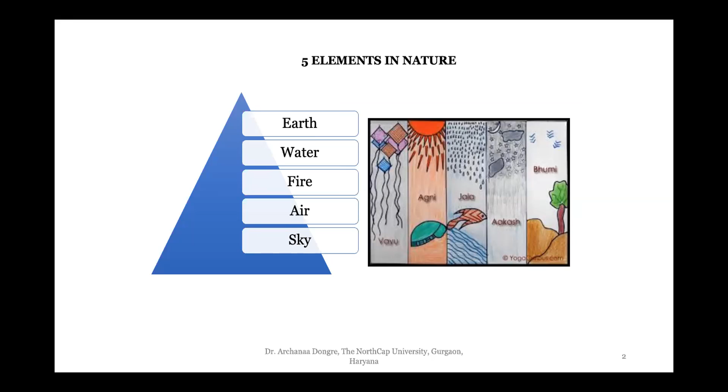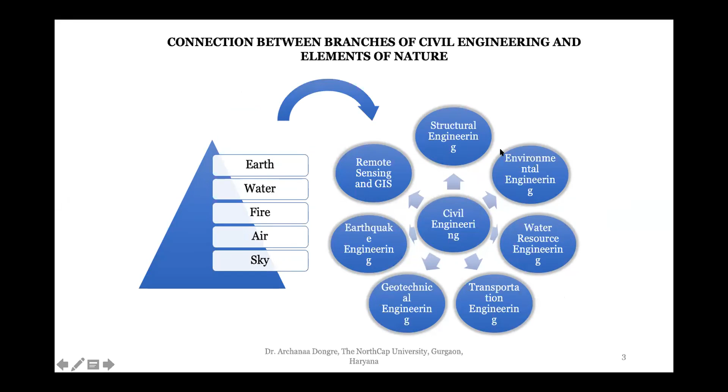Being civil engineers, most of you are faculty, so you know this wonderful thing - we take all these elements, and there are so many branches in civil engineering, and you must be expert in one or more of these branches. So nature and human beings, there has to be coexistence, and harmonious existence for us to sustain. The word sustainable, we are using more and more, because everyone is working towards sustainable development now.

In civil engineering, we always talk about it, that equation of equilibrium should be satisfied - we've heard it a thousand times maybe. And that is the most important thing, how do we get that equilibrium. So equilibrium in nature, and even while studying civil engineering, that equilibrium we have to see.

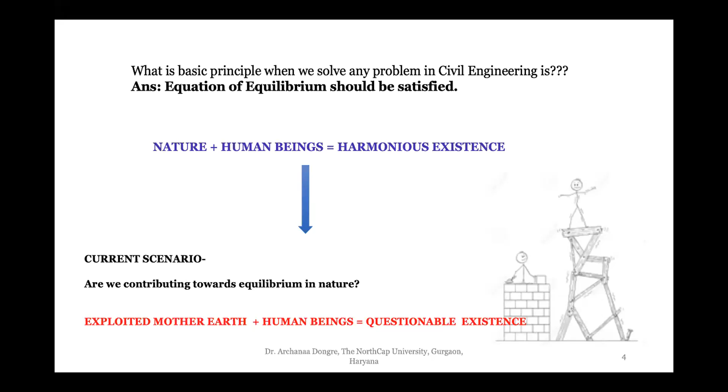But the current scenario is exploited Mother Earth, and human beings are the reason for that, and our existence itself is questionable, and we are currently experiencing that.

Now, when we see our past, we are really blessed with a great civilization. If you see these examples of Nalanda University, the ancient temples, and Mohenjo-daro - how beautiful our civilization and our history was. We witnessed the best, I think, of history.

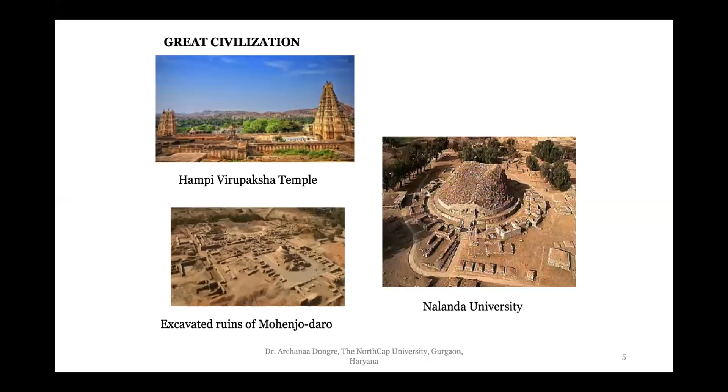But yes, there are some challenges. What were the challenges, I'll show you in the coming slides.

So this is an example of a concrete jungle - you will find so many photos on Google. When we see it, we really feel, my God, what's happening literally? Where is the tree, if you see in these pictures? That's the total failure in maintaining this equilibrium in nature.

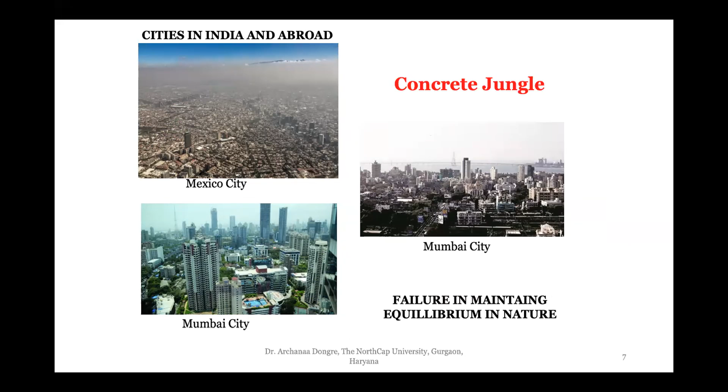And why am I showing this picture? Because we are civil engineers, right? We are the leaders, we are the builders of this. So I wanted to show where we are heading. Similar examples of Delhi, Bangalore, Ahmedabad, and the industries and air pollution happening. Currently I'm sitting in Gurgaon, and this pollution is at its highest rate especially in Delhi.

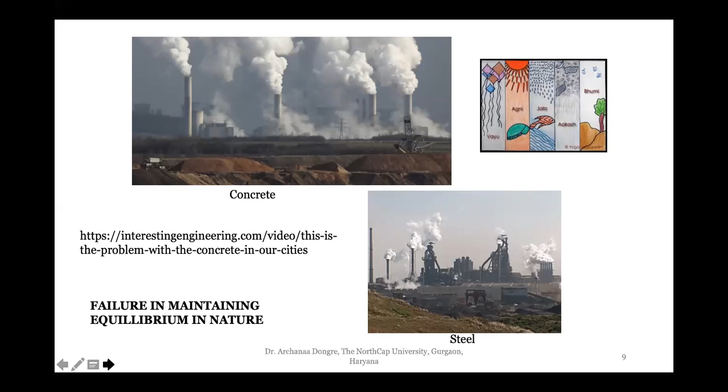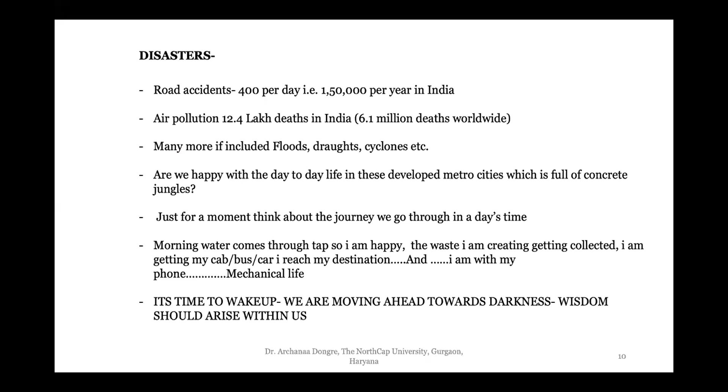Apart from that, this slide is showing us other disasters, right? Road accidents - 400 per day. That is, I think, maybe a small number, and maybe reduced during the lockdown period. 150,000 people die in India because of road accidents. Again, civil engineering is connected here - that's why I'm showing this. Don't think, okay, why this slide?

So this is total road accidents - again, we are responsible. Then air pollution: 12.4 lakh deaths happen in India, 6.1 million deaths worldwide. So we are again responsible here. Then if you remember the Chennai flood, drought, cyclones - there are so many examples where we are again connected.

So are we really happy with the day-to-day life in these developed metro cities, full of concrete jungles? What is happening actually is we are so used to getting everything delivered at home. I have a cab, bus, car, everything - so much comfort we are having, we're experiencing in our life.

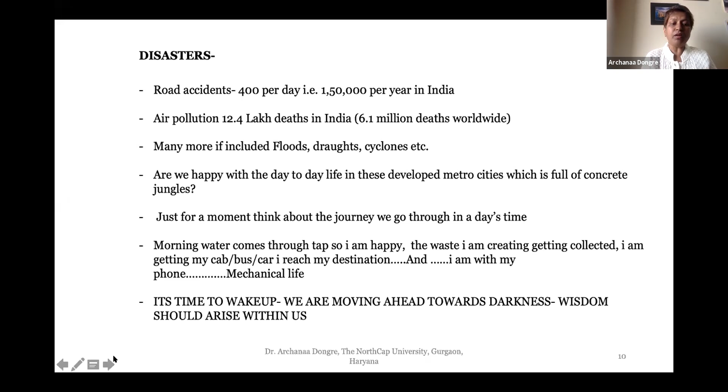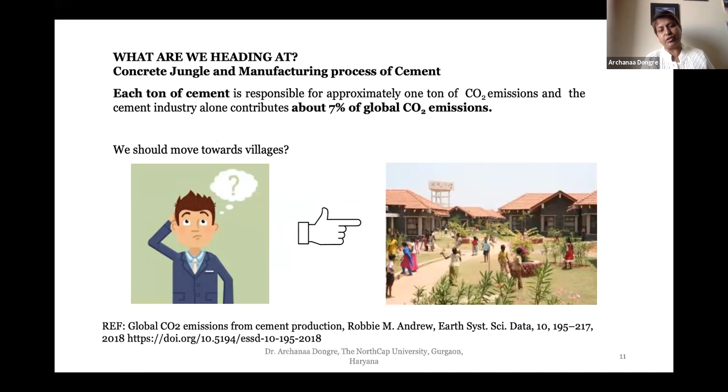Water is coming to me, everything is reaching to me, but we are contributors. Like civil engineering, at one side it is contributing, but at the same time somewhere we are responsible for the equilibrium. Each ton of cement is responsible for approximately 1 ton of CO2 emission, and the cement industry alone contributes to 7% of global CO2 emission. So this is one very big challenge in global warming.

We have to see that this shift shows the fundamental relationship between engineers and the natural world. We have to understand that man and nature are not separate entities. Engineers today must design for a planet with limited natural resources, complex problems with no clear answers, and increasing environmental concerns. So we have to think and find solutions.

This is, I think, very important. Every civil engineering student and faculty, we have to share this code of ethics for civil engineers. I share it with my students. These are drafted by ASCE. Number one, we have to hold safety paramount for civil engineers.

Then service with competence, like doctors have their oath ceremony, and they have to follow it. Similarly, civil engineers, I think we are more important than doctors, because if one structure falls, so many deaths can happen. So we are more important than them.

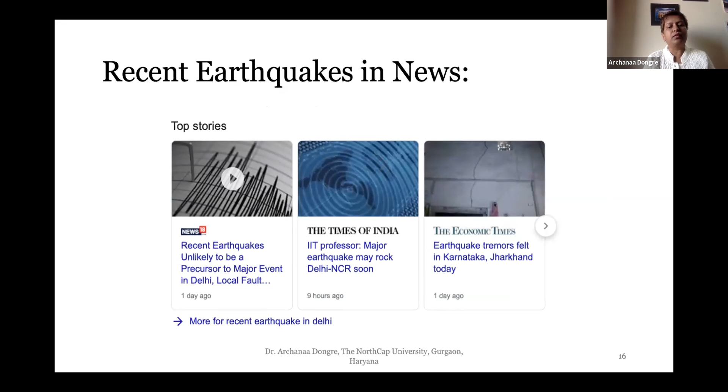These are again few examples. Now coming to earthquakes, this is also an old picture. If you just type in Google 'recent earthquakes in news,' you will see many such continuous earthquakes happening. Our earth is continuously moving. Some or other earthquakes keep on happening every time, but the magnitude is very less, so we don't realize its effect.

Earthquakes and their impact on rural structures: there are three phases. First we have to have awareness about it, about the effects of earthquakes in rural structures. We need that awareness about earthquakes, basic information on what it is, how it can cause impact on society, and then what is the cutting edge research. I think we as faculty come in this cutting edge research part.

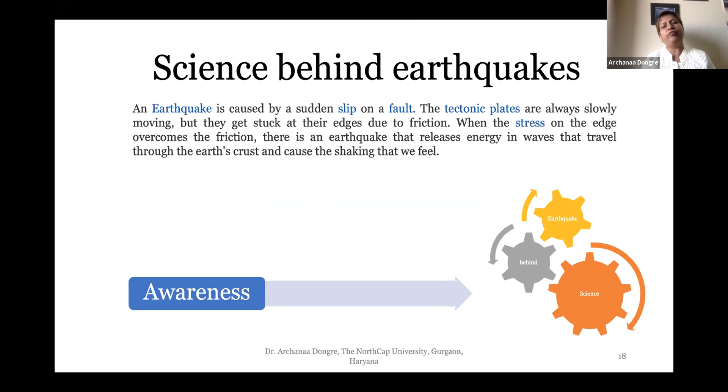Now, the science behind earthquakes, I think everyone knows, so I'll skip a few slides and go quickly. We all know earthquake is caused by sudden slip on a fault, and there is movement of tectonic plates, causing friction. When the stress on the edge overcomes that friction, energy gets released and waves form, and that is an earthquake. Classification of earthquake is based on origin, location, focal depth, epicentral distance, and magnitude. This is basic, mostly for BTech students, so I'll skip that.

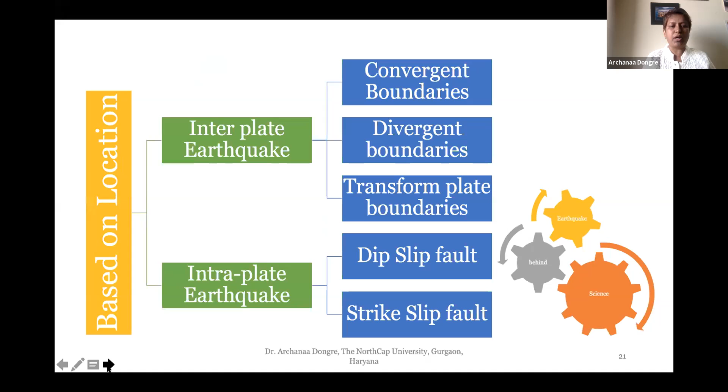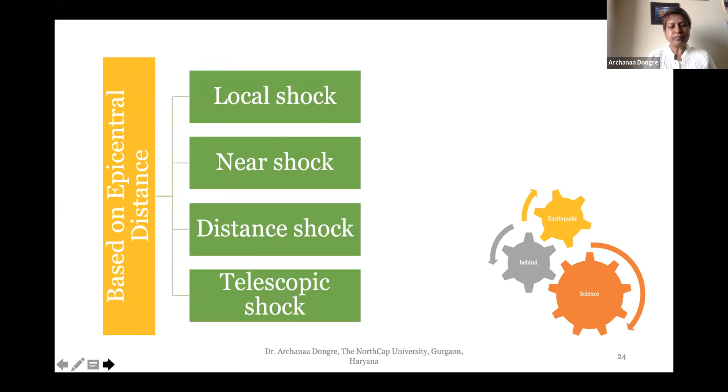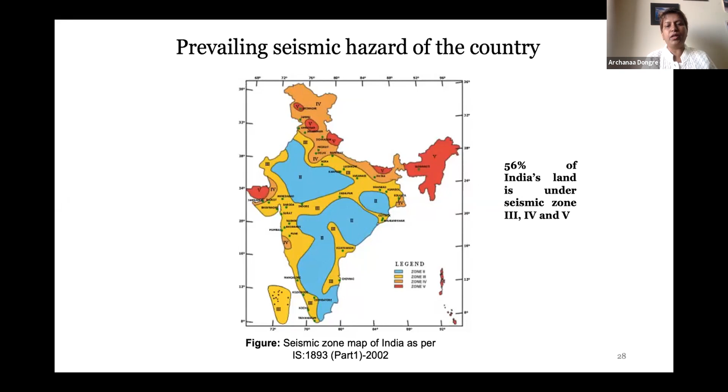Now coming to a very important picture. Maybe the first two lectures already showed you this, but this particular zonation map, the seismic zone map of India, is in IS 1893:2002, and now a revision has also come. From 2016, there are many suggestions on this map as well, so this map may also change. Here we know that we are in zones 2, 3, 4, 5, and 56 to 60% of India is under seismic zone 3, 4, 5. So this is an alarming situation.

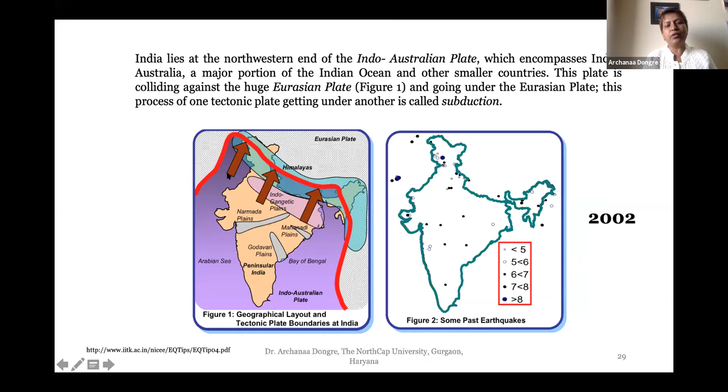So this is a picture from 2002. In 18 years, we don't know what is the current scenario over here, what is the current development. Then here is one more picture, updated for 2016, where we can see the Indo-Gangetic Plains. So this is the current update we can see.

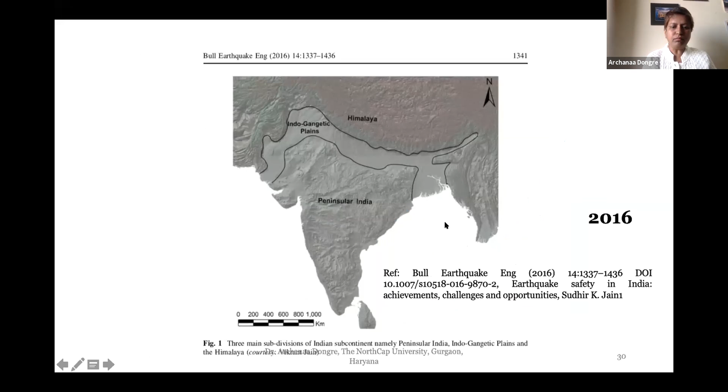So this shows the location of some significant earthquakes in the Indian subcontinent. Wherever big dots are there, that is magnitude more than 8. Smaller dots show where earthquakes came which were less than 6 magnitude. A little larger dot shows magnitude of earthquake between 6 to 7, and then 7 to 8. This is the data from 2002.

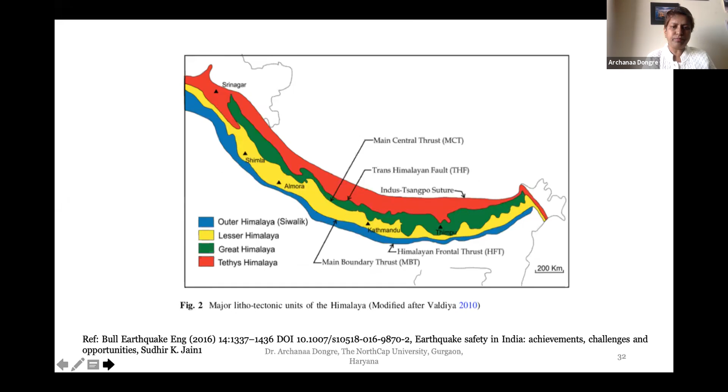Then here is a bigger picture of the major lithotectonic units of the Himalaya. From this, we can observe there has been a regular occurrence of great earthquakes in the Himalayas, and currently most of the seismic activity is located south of the main central thrust. So North India is experiencing earthquakes now and then; small shocks we keep on experiencing.

Now, peninsular India, even though far less active seismically, has also seen some very damaging earthquakes. I'll take your attention to this: Koyna earthquake 1967, Latur 1993, and Bhuj 2001. So it is clear that most parts of India are prone to earthquakes of varying magnitudes and with varying probabilities of occurrence.

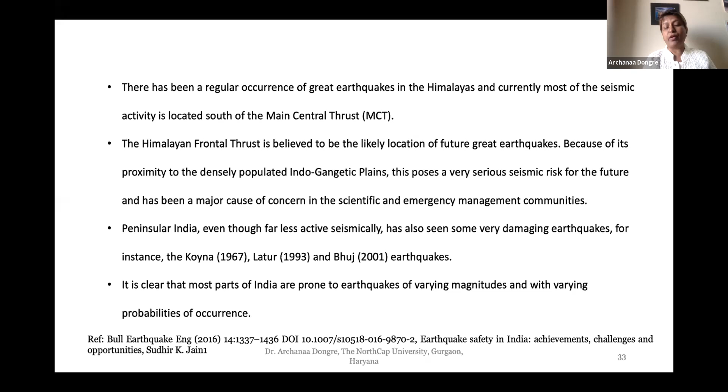Now this was part of my study: past major earthquakes that hit brick masonry construction in India. So what I did was consider 5 spots in our country - Bhuj, Gujarat, then Chamoli, then Latur, Killari, and Uttarkashi and Assam. I selected these 5 locations and studied the effect of earthquakes on brick masonry buildings. That was part of my study.

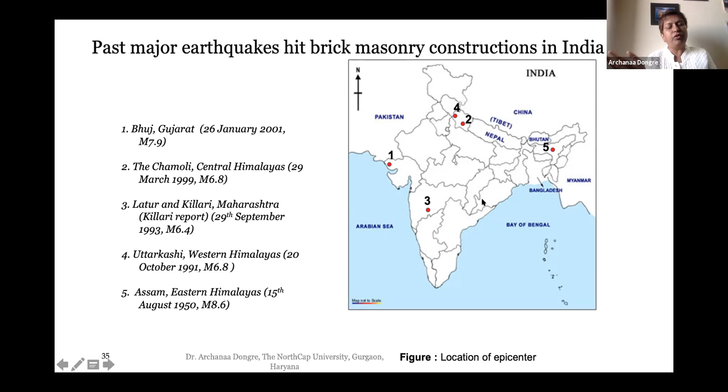We'll come to that. Before that, I have the observations of the Latur and Bhuj earthquakes - you know, the devastating earthquakes at both places.

So Latur 1993, here the magnitude was 6.2. This is the data we got from the Government of Maharashtra. Total people killed were 7,600 - 7,635 persons were killed in 52 villages. But you know, there was bad luck involved, because the time was 3:53 in the morning, so people were in deep sleep. It was a very cold night, a chilly night. Because of that, there were more deaths, even though the magnitude was only 6.2.

So there were casualties in almost all villages that experienced shaking intensity of 7 or greater. The earthquake focus was shallow, hence only a small area was affected, but with a high level of shaking - they experienced shaking up to 9 on the MSK scale. And the house typology was very vulnerable to seismic shaking; random rubble masonry was there in mud mortar.

So what happens with rubble masonry is that people keep very heavy stones on the roof, so that if big winds or some cyclone comes, the roof should hold. But during the earthquake, those big boulders on the roof only created collapse of the building, and the people could not survive. So that was a negative point of it.

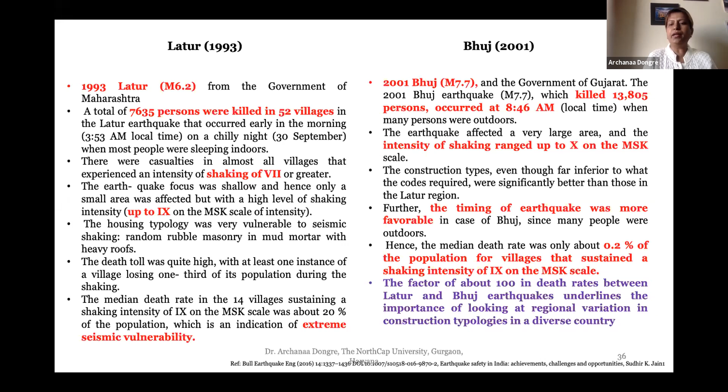There could have been more deaths than this, but the timing was a little better, so many people were saved. The earthquake affected a very large area, with intensity of shaking up to 10 on the MSK scale. Now the timing was more favorable in this case, and only 0.2% of the population of villages sustained a shaking intensity of 9 on the MSK scale. The factor of about 100 in death rate between Latur and Bhuj earthquake underlines the importance of looking at regional variation in construction typologies in a diverse country.

I want to bring your attention to the fact that India has 6 lakh to 1 million villages. I purposely took Latur and Bhuj as examples, but we have such 6 lakh to 1 million villages and around 100 smart cities. Much typical construction now happens with brick masonry houses, so we really need to work on this area.

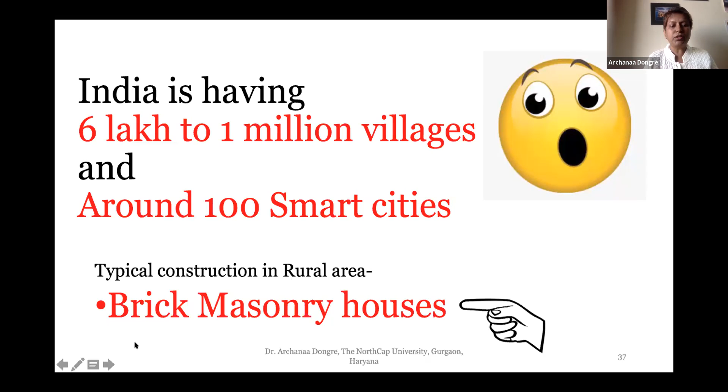There is really good work happening, but the implementation part is where ignorance still exists. Technically sound people are not there. Mostly masons are taking care of everything, and that education has not happened to them.

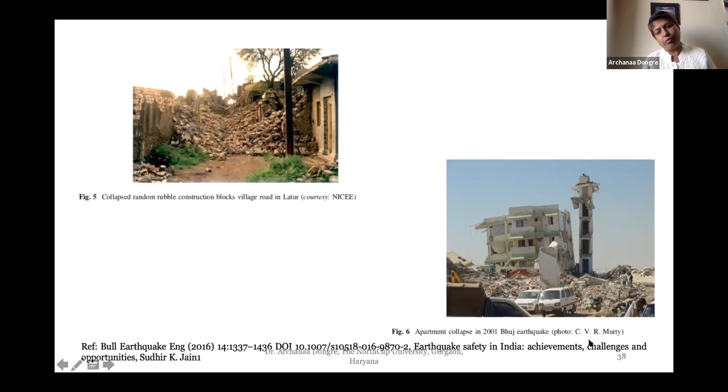So here are a few examples of collapse of random construction blocks - a village road in Latur, and on the right side, this is a 2001 Bhuj earthquake building. Professor C.V.R. Murty sir, click this.

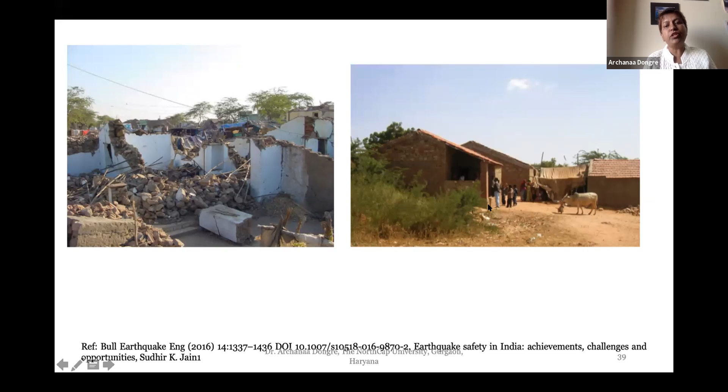This is an example of earthquakes. I got this from this document, but this is also from the Bhuj earthquake, and these are standard houses which could sustain that earthquake.

The challenges in the Bhuj earthquake of 2001 highlighted a striking disregard for structural design principles and quality of construction. This earthquake was the first instance of an earthquake causing collapse of modern multi-story buildings in India, and it triggered unprecedented awareness among professionals, academics, and the general public. So one area of major concern is the lack of a professional environment to ensure safe construction. Here the term safe construction is used in a broad sense, not just in the narrow context of seismic safety.

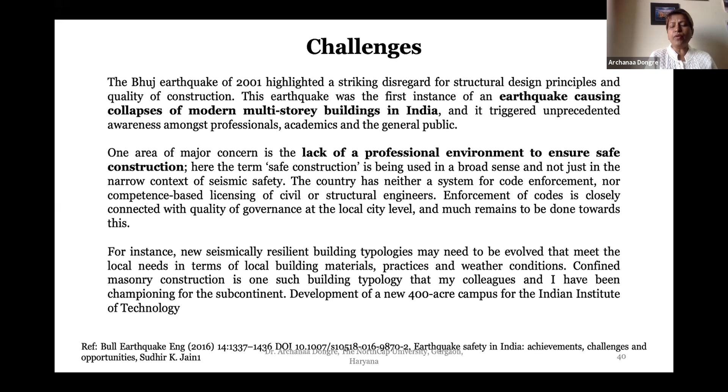We still have challenges even now. You might be aware of soft story buildings - even in cities we have that challenge. My professor, my guide, used to call them 'atom bombs.' If you have a soft story building without a shear wall, you should go check whether your building is a soft story building - meaning only openings are there, without a continuous wall or shear wall - that is a danger in case of an earthquake. Otherwise, there is no need to worry.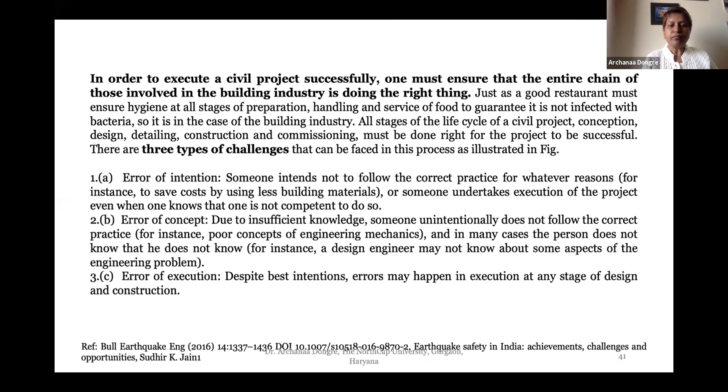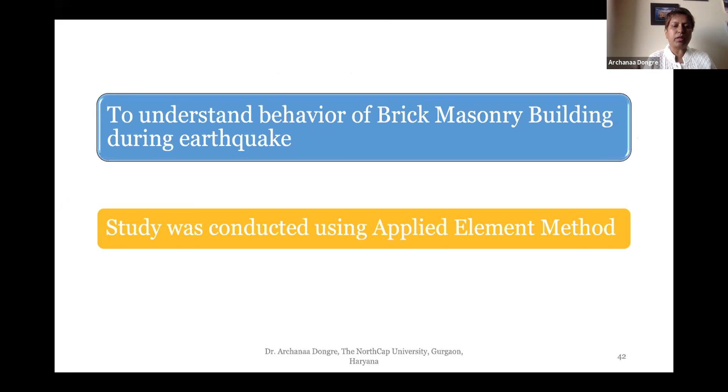Coming to my area of research, to understand the behavior of brick masonry buildings during earthquakes, I have used the applied element method. It was a Fortran program, a discrete element method program I used. I had to write the program and use material models.

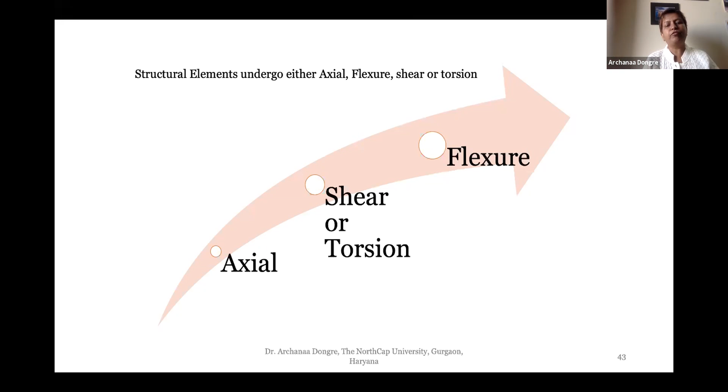Whenever we see a structural element, the basics are this: any structural member we consider experiences axial, flexure, shear, or torsion - these are the basic forces. Our life as civil engineers revolves around all this - we always think about axial, shear, and flexure as the major forces.

When I studied the performance of brick masonry buildings during past earthquakes, I observed there are 4 main types of failure for such buildings: vertical cracks at wall junctions, shear cracks, cracks due to in-plane movement, and failure due to out-of-plane movement - that is, a wall leading to total collapse.

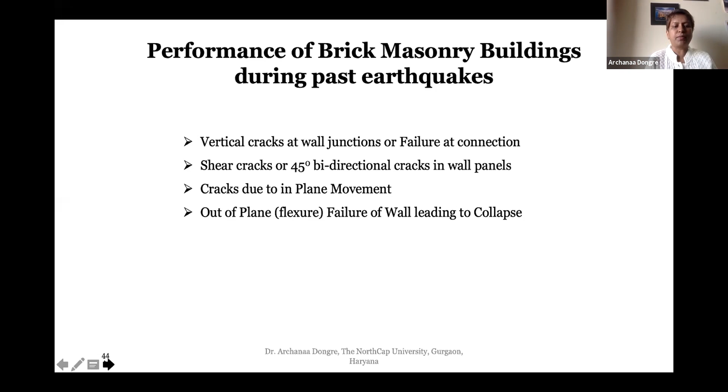This is one example of a vertical crack - this is a big wall, and here is the vertical crack at the wall junction. This is one type of failure you will see, and it is an example from the 1993 Killari earthquake.

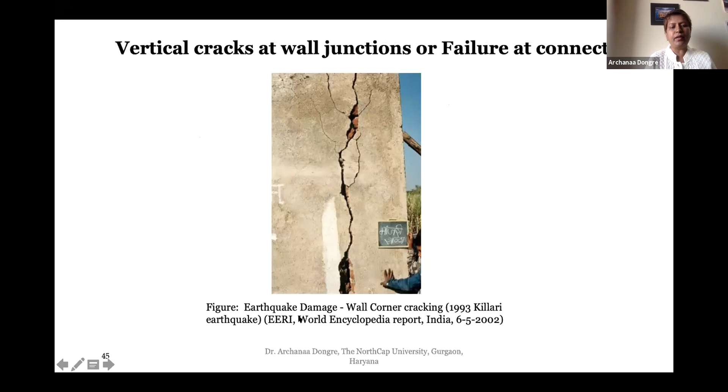This is a beautiful example of shear cracks, or 45-degree bidirectional cracks. Shear cracks are always at 45 degrees. So this is the example of shear cracks.

Here there's sliding failure of the roof and wall connection due to absence of wall reinforcement. There was no lintel provided, and due to that, this failure occurred here - you can see the shear cracks. When there is earthquake movement, you can also see vertical failure here.

Then these are the shear cracks. Crack number 1, 2 and 3 are shear cracks, and crack number 5, maybe there is some settlement of foundation. So crack number 5 occurred over here.

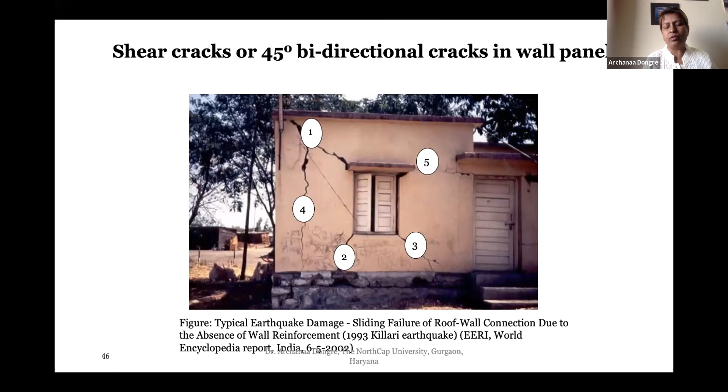So earthquake is a disaster, but it also teaches many things. We have to learn from earthquakes and work upon it so as to strengthen our building. Now this is one example, cracks due to in-plane movement of earthquake.

So here this is shear and flexural cracks along with separation of wall from roof. This is one example I have taken. You can see the connection, there is a failure here, upper failure, and even the cracks here. So this was because of in-plane movement.

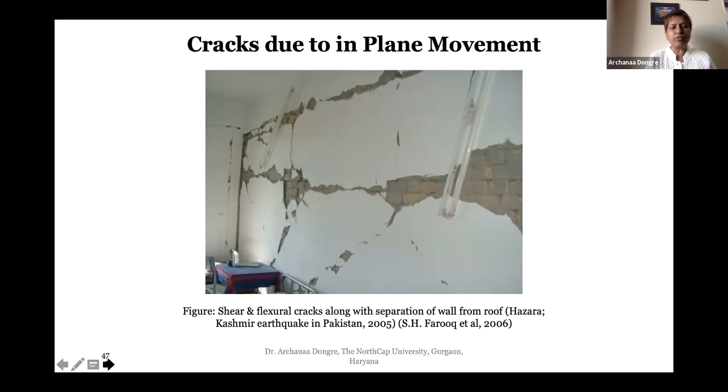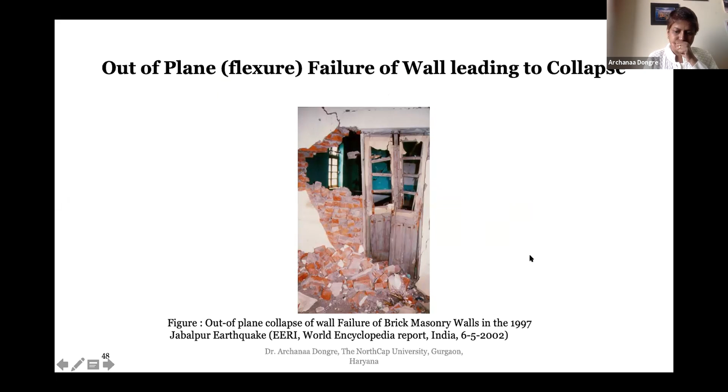Now, what is important here? So the 4 walls are there. Box section is very important.

When the 4 walls are connected properly, it creates a box section. So this box section I have tried to model in 3D, and it gives more strength and stiffness to the building, which is almost double when compared with the total stiffness of individual walls put together in 2D analysis.

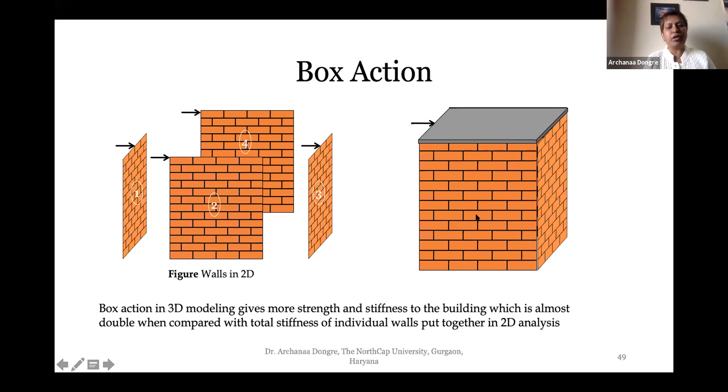So what this particular picture says, if you take an individual wall and apply load on it, versus when you take the total box, it has a very good effect. It gives more strength when it is acting as a box. So box action plays an important role in such buildings.

Now in applied element method, what do we do? First of all, why have we chosen this method? The beauty of this method is that it is capable to show failure, from the small crack, from the initiation of crack to the total collapse of the building. That's the beauty of this method.

And in this case, here we can see these are the two elements. So here, what do we consider? We divide the whole wall into small elements, and here these two elements are connected with springs.

Every two elements are connected with a spring, and this spring has a stiffness of normal and shear. You can see this spring coming in the normal direction, that is a normal spring, and this is a shear spring. So the whole element in all directions is connected with springs.

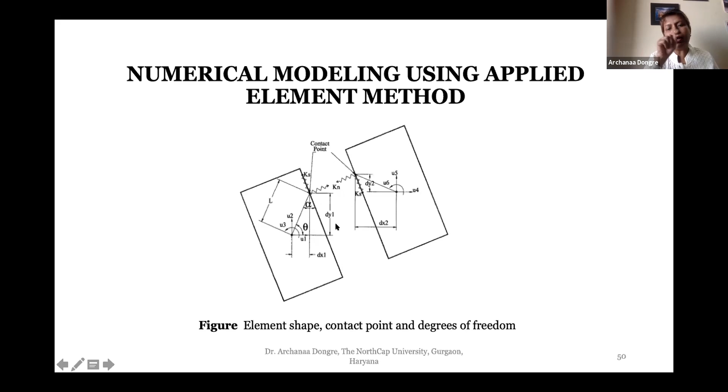That is the basic concept of applied element method. Now this is discretization of brick masonry. One brick is again divided into small parts. So this is one brick.

And the gray portion you see, that is the mortar bond. Wherever mortar is there, those springs will take the mortar property, and wherever brick is there, it will take the brick property. So here we call the brick a unit spring and the mortar a joint spring.

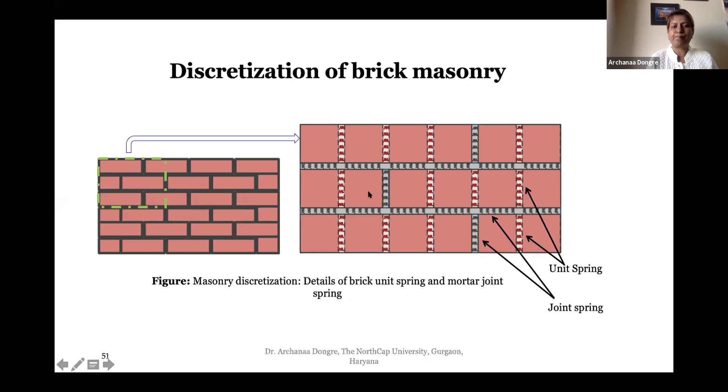Now these are the equations I have used for stiffness of spring in normal direction and shear direction. And this is the brick model, showing how the brick will fail. And this is total failure. F1, F2, F3 shows the failure plane.

How the... I'm sorry, but I'm getting disturbed. Some voice is coming.

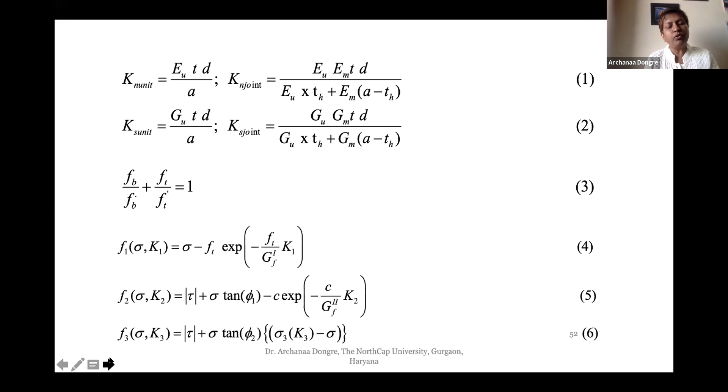Then F1, F2, F3, these are the failure planes. We have to model, write all this in the program, and then run it, and we'll see the failure patterns. So this is the model I have used.

For brick masonry, there is a cohesion degradation, bond degradation. There is a bond between brick and mortar, so how the bond will degrade when earthquake load is coming. Then how is the failure criteria for joint spring, and then hardening and softening for a joint spring.

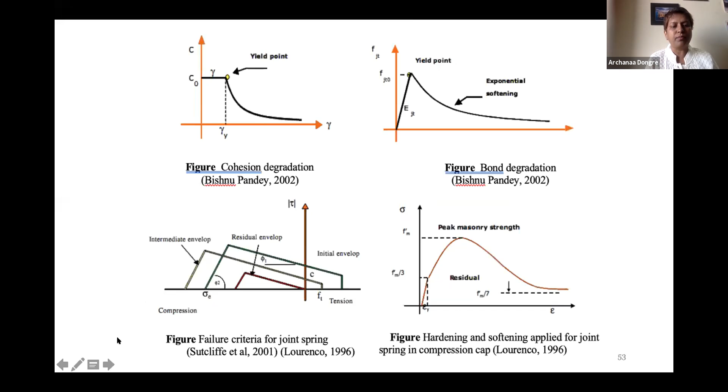So this is the modeling I have used, and these are the equations related to these diagrams. Then there is also concrete in tension and compression, how concrete will behave, how it will fail. Then concrete in shear, how concrete will fail in shear. So these are the models I have used for failure of concrete, and also this is the model for steel.

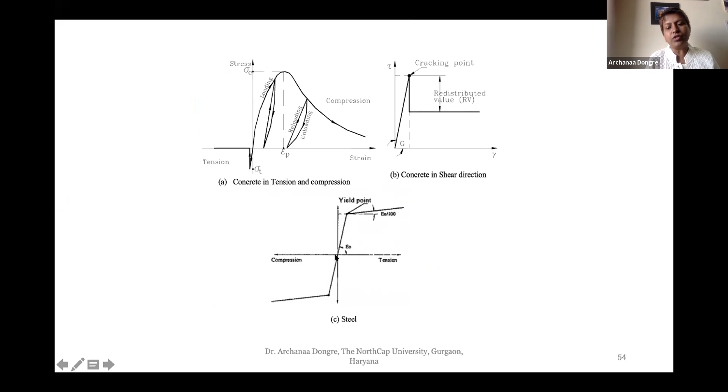So all the material we model, we have to write a program about it, and that program should run. In this study, I have considered aspect ratio, meaning how walls of different sizes behave when some load is acting.

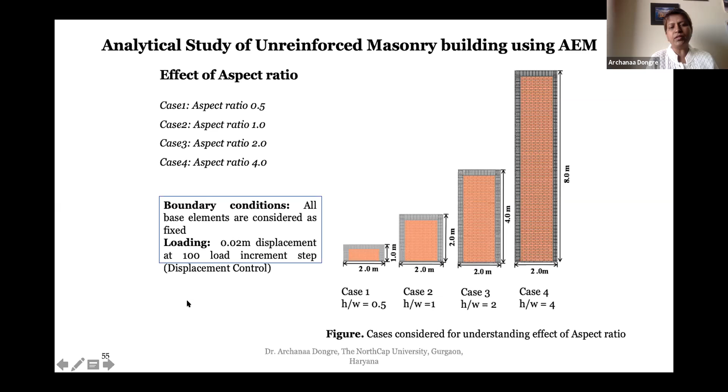My observation is that when the aspect ratio is very small, it has very high stiffness and very good strength. This is the diagram of base shear versus drift ratio, and a low aspect ratio shows very good strength compared to when you take the aspect ratio as 4. So as aspect ratio increases, the strength of the wall decreases.

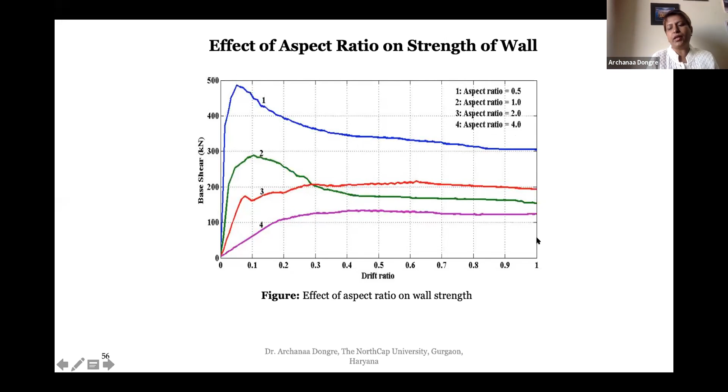Then there is also a study about wall openings. Nowadays there is a fashion of keeping, if you see buildings, a huge balcony side where the whole wall is open and a beautiful glass is there. We are going towards that type of lifestyle, but it actually reduces the strength of the wall, so that is a dangerous thing.

So a similar study I have done here. I considered a wall without any opening, and a wall with a window opening. Then a different positioning of door, one at the left side and one in the middle. In these 4 cases, when I gave loading, it is obvious the full infill wall has the highest strength, but we cannot keep our home closed, right? We have to keep an opening.

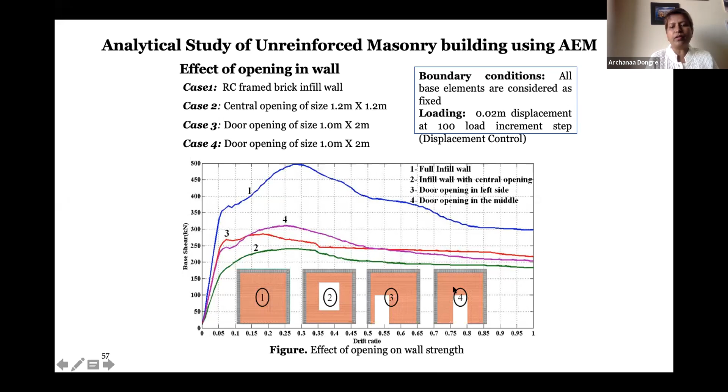The second case, infill wall with central opening, gives a little lesser strength because the wall opening was more there. Then there's a door opening, which gives almost similar strength, whereas middle door gives a little better strength. However, they are comparable and both are okay.

Then coming to earthquake forces, here is a comparative study of inelastic behavior of RC frame with and without brick infill. I considered 4 cases: RC frame with brick infill with no reinforcement, then with vertical reinforcement, then with horizontal reinforcement, and then with both vertical and horizontal reinforcement. Horizontal reinforcement means reinforcement at the lintel and sill, and here the vertical reinforcement.

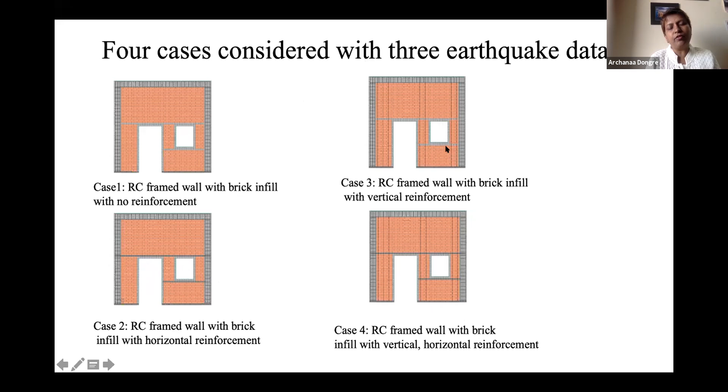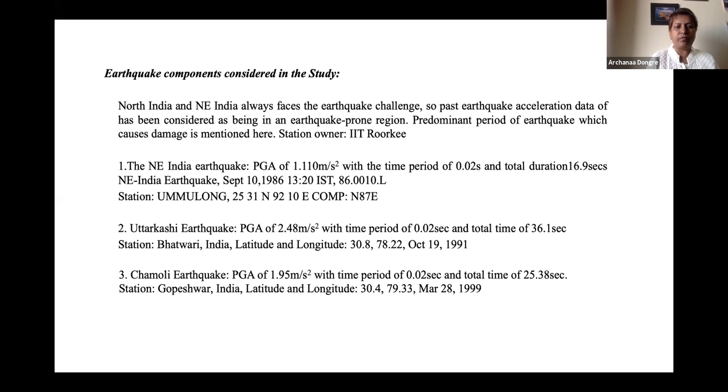So this is the strengthening measure I considered in this study. I considered 3 earthquakes: the Northeast India earthquake, Uttarkashi earthquake, and Chamoli earthquake. These are the station details. Then for the Northeast India earthquake, this is the acceleration time history I considered.

We see the 4 cases of roof displacement response, meaning for this particular wall, when the earthquake data was given, the roof displacement was like this. Here we see when there is no reinforcement at all, this is the cracks at peak ground acceleration in the first diagram, and the second diagram shows more cracks when there is no external reinforcement.

When horizontal reinforcement is provided, only lintel and sill reinforcement, it gives really good strength. You can see the number of cracks reduced, these bottom pier cracks are totally reduced. That is the effect of the lintel. We have to provide and advise others that they should provide lintels and sills, it's very important. And then the vertical reinforcement.

Provision of vertical reinforcement is also done here. At peak ground acceleration there were no cracks at all, but till the end of the earthquake, since this earthquake was only till 16.9 seconds, there were some minor cracks at the end. And when both horizontal and vertical reinforcement are provided, it has lesser cracks when we compare case numbers 1, 2, 3, and 4.

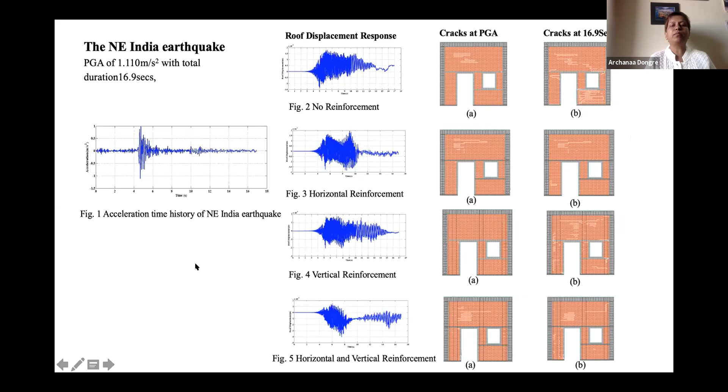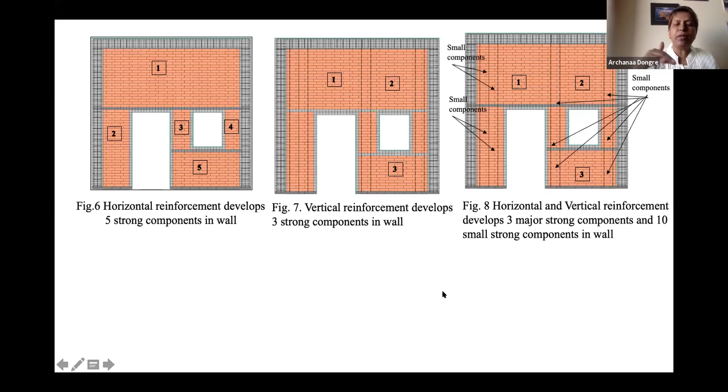Then coming to the horizontal reinforcement, a little more elaborate diagram here. This horizontal reinforcement develops 5 strong components. The observation is that when we provide this reinforcement, the wall gets divided into these components, and they act as strong components that resist the earthquake. With horizontal and vertical reinforcement, there are 3 big components and some small components which also resist the earthquake. A similar observation was seen for what happens when this reinforcement is provided.

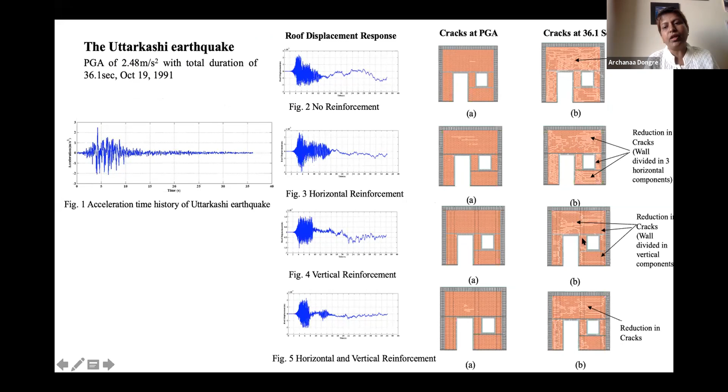Similar observations were there for the Uttarkashi earthquake as well. When this time history was given for this particular wall with no reinforcement, there was a huge number of cracks on the right side, which were minimized when we provided horizontal reinforcement, vertical reinforcement, and both reinforcements together. So there is definitely a reduction of cracks when we provide this reinforcement.

This was the advice for the provision of reinforcement, and similar observations were seen for the Chamoli earthquake also. So that was the observation.

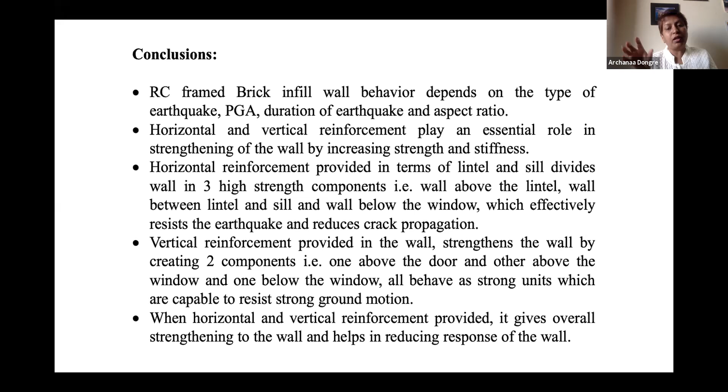The conclusion was that this RC frame brick infill wall behavior depends upon the type of earthquake, peak ground acceleration, duration of earthquake, and aspect ratio. We have also seen the effect of horizontal and vertical reinforcement, and how the strong components are forming during this earthquake and how they are resisting it. So that's what we have seen here.

There is one very important study at Tokyo University. Actually, this applied element method program was taken from Tokyo University, and then we changed it as per our Indian needs. This AEM method was developed at Tokyo University, and an experimental study was done using PP bands.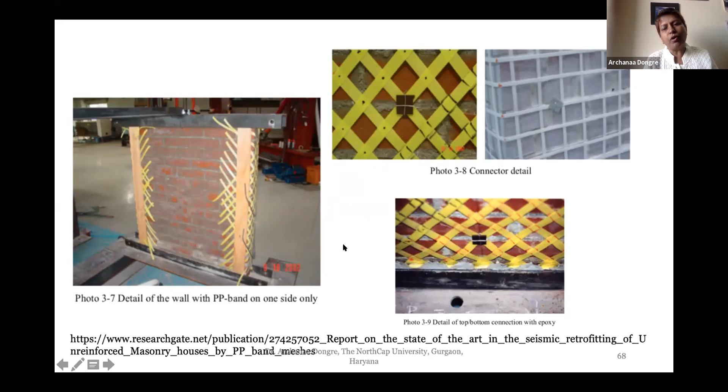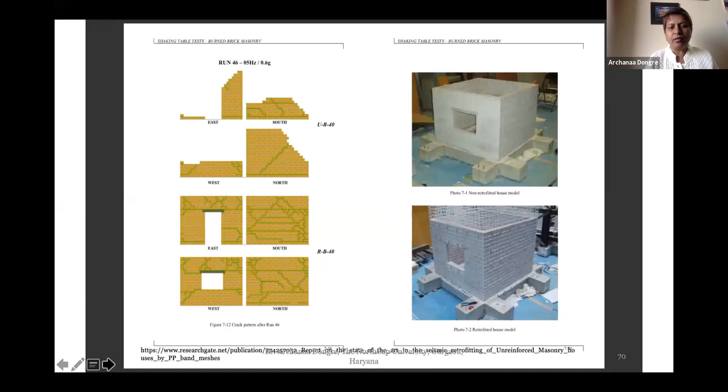They have done the study, which was also modeled in applied element method, and the results were compared. It was very good in resisting the earthquake. So this is also one way that we can go ahead with this type of band and save our structures.

So this is the presentation I wanted to give. What is the takeaway from this lecture? I think we have to remind ourselves again and again that we have witnessed a rich ancient civilization, and as civil engineers, as global leaders, we are responsible for that.

During my study, the effect of aspect ratio shows that a lesser aspect ratio gives very good strength. As the aspect ratio increases, the strength gets decreased because flexure is acting more there, so because of flexure it gets lesser strength.

The effect of box section is definitely very important, and it gives overall very good strength to the building. Then a study of RC frame infill wall without any opening, and with opening in the middle, and the door at the left and right side, that we have seen in this presentation.

For the earthquake loading case, we have seen the permanent deformation of RC infill wall with no reinforcement and with reinforcement, and the effect of reinforcement on total resistance to earthquake. A good resistance to earthquake can be achieved by providing this reinforcement, and provision of reinforcement actually helps in minimizing damage to the wall.